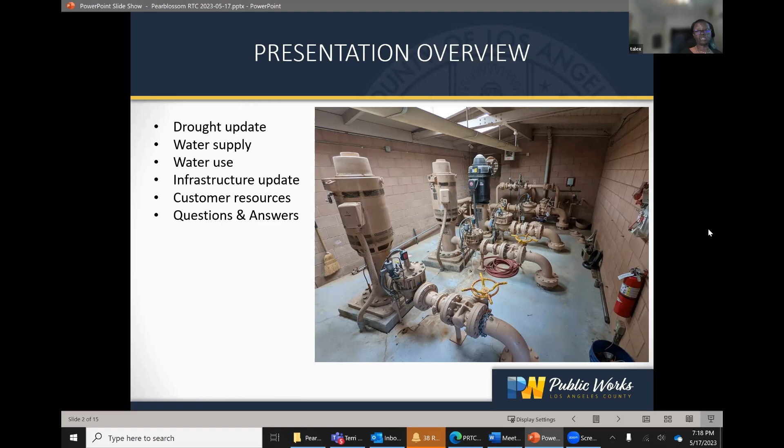Next. So first, let's start with some really good news: recent storms have helped California's reservoirs recover. But as you know, California had historic dry conditions from 2020 to 2022. Additionally, the Southwest US is still in a multi-decade drought, which means that Southern California's water challenges are far from over.

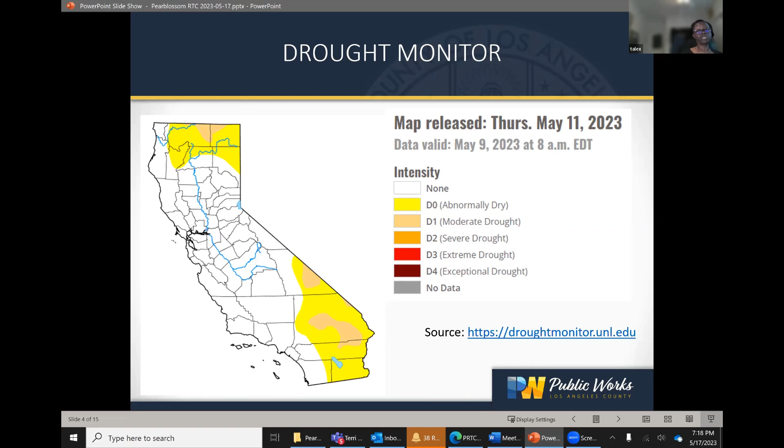Next. All right, so as a result of the winter storms, surface water supplies for the state are very healthy. However, one good season of rain does not undo the prolonged and extreme drought. So statewide, groundwater supplies are still low, and it'll take several years of rain to replenish. Just as quickly as the drought flipped this year, it can flip back just as quickly. So the region must work to ensure that we keep our water conservation efforts going.

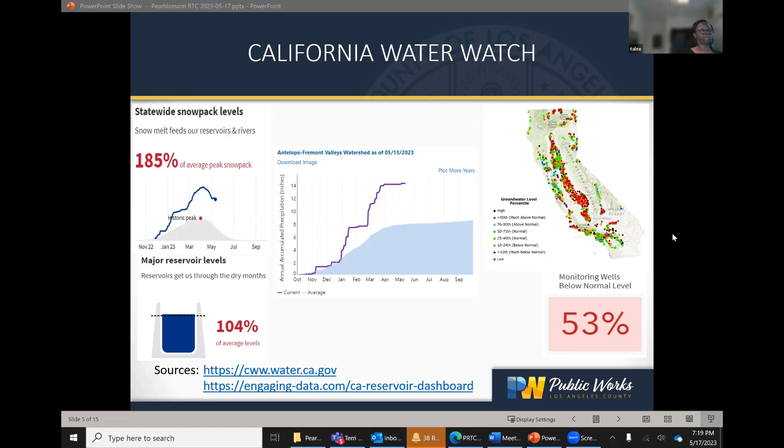Between 40 and 70% of water usage is for outdoor irrigation, as I'm sure you know. So we want to take this chance and thank you for your conservation efforts and to encourage you to keep up the good work.

Next. All right, so where does that leave us for this year? As you know, Governor Newsom rescinded the emergency executive order requiring water suppliers to activate the level 2 water shortage contingency plan. So this means that we have removed our two-day-per-week watering restrictions, and the updated outdoor water use restrictions will be included on our website soon - I'm thinking if not tomorrow, probably Friday or Monday, okay?

But even though the governor's order has been rescinded, we're still encouraging conservation as a way of life, which helps ensure our water supplies are safe, resilient, and sustainable. Because even though it's been a really wet year, our weather conditions can quickly turn from wet to dry, so we must be prepared for dry conditions if they return.

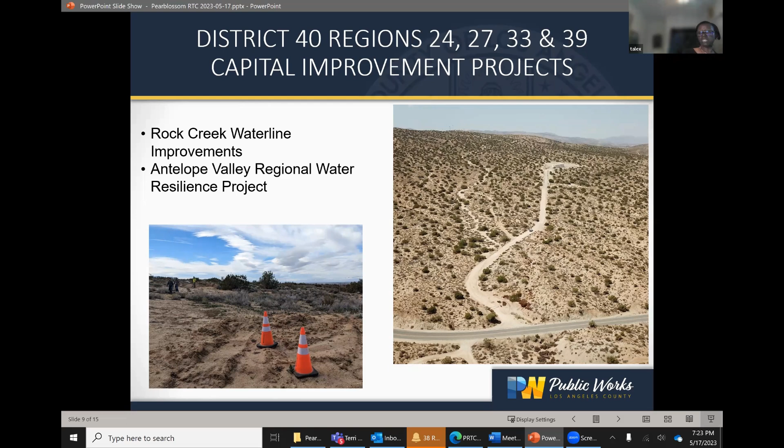We're always working to make our operation as efficient as possible. We're actively pursuing grant funding, loans, and other means to supplement the budget and support critical projects.

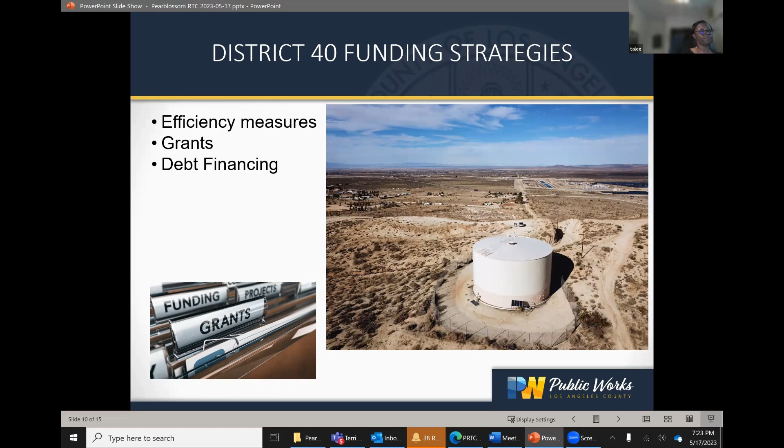Waterworks staff work 24/7 to ensure uninterrupted, safe, clean water. This includes routine maintenance, customer service, water quality, mechanical operations, inspections, and repairing leaks. We strive to maintain waterworks assets to industry standards to ensure they provide the expected cost-effective service life.

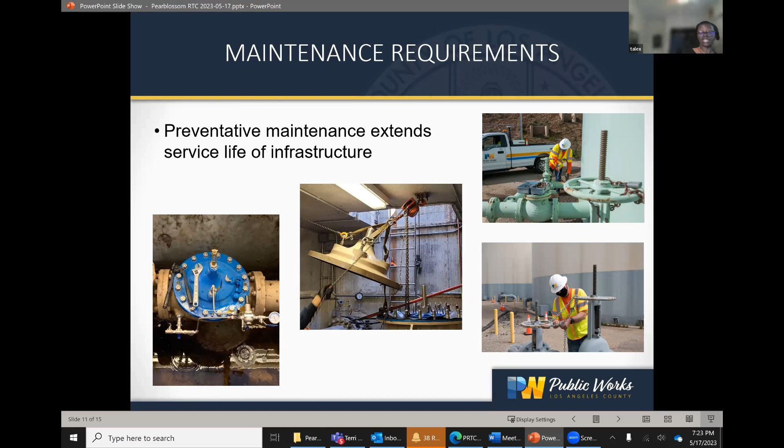We've made substantial investments in modernizing our system, resulting in more efficient operations and increased uptime. For example, we've improved resiliency by installing solar panels and battery backup, and monitoring and communication equipment to ensure uninterrupted operations during power failures. We've implemented a comprehensive asset management program to evaluate risks and prioritize investments, and we're reevaluating and optimizing maintenance procedures.

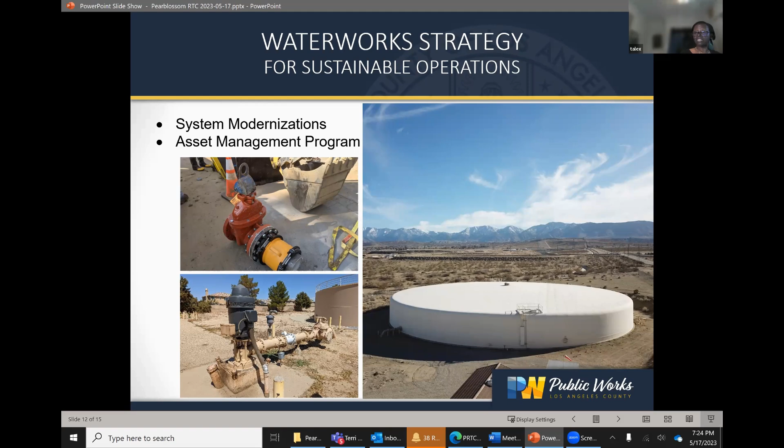Before I close, I'd like to remind you again to visit our website for information regarding the low-income household water assistance program, which will assist you with past due water bills, as well as to sign up for text alerts and to report water waste or obtain information about conservation and tips.

The drought is a quickly evolving topic. We'll keep you updated as changes occur. Waterworks is working to improve infrastructure resiliency. Thank you for your continued support and involvement. We are your water district and we exist to provide your community with safe, clean water, both today and for the long term. Thanks.

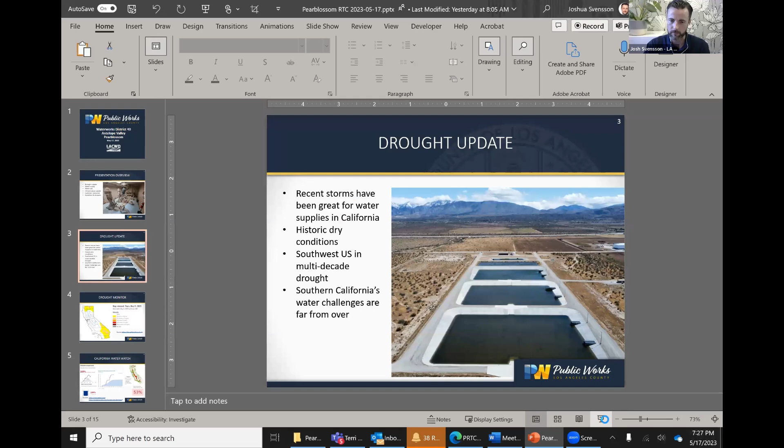That's a great question. I said I turned off the screen share, it's too late. I'm not able to play the new card much longer. I've been with the district 2 years now, and it's been about a year since I joined you guys for the first time, so I'm still learning all the ins and outs. But one of the things we do actively is recharge strategy, which is really important to us. That's why I wanted to include this picture—I think this is called the East Side Infiltration Project or East Side Recharge Project.

This is an AVEK project. This is one of three projects that AVEK has, and this one is much smaller than the two that are up in the north part of the county.

But generally speaking, we're very supportive of aquifer recharge. It's a great idea. Right now, the state has excess water. They're basically giving it to customers without taking away from their water allocation. It's called Article 21 water. It's not free, but we have to pay for it because of the delivery costs.

But we're getting as much of it as we can, and when I say we, it's being done by AVEK, our wholesale partner, and they're taking that water and using these facilities. There's even plans. This is a photo I took a week or so ago out on 106th, so this is in your neighborhood.

The Rock Creek one, I need to look into that. I have heard of that. I'm not as familiar whose project that is, and I don't believe we're involved, but we may be. I think it's a great idea, and I think it's absolutely the right strategy for the long-term, to help even out the climate whiplash.

Sweet. It took me a second to recognize that picture where it was, but I know exactly where that is.

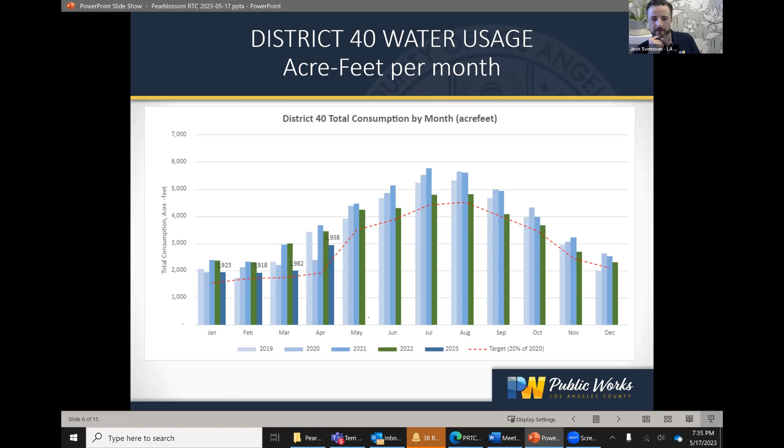It's really neat - let me find the slide. District 40 covers a lot of the Antelope Valley, but we call your area the cluster because it's these four different subregions. Your little subregion is kind of like its own very interesting microcosm of a water supply, because we're pulling water from the aqueduct and getting water from the aquifer, and there's recharge. Everything is kind of happening right there and you can see it all happening. So a tour of your region would be really interesting.

I think a couple of us here would enjoy a tour. I got a big Ford Excursion - I could put 8 of us in there on a cruise. We've done it before - we took the county out and some other community members and leadership. So looking forward to that.

Great, does anyone else here have any questions? One more - I think Robert has a question. So I've been in this town a long time.

When I was a kid growing up here, we drank water right out of the tap. It was delicious back then - not so much anymore. I can't speak for everybody here, but I drink bottled water now. It's not as good anymore. Are they treating it differently than they did 30 years ago? And where's the water coming from? Yeah, great question - let me just write this down so I can remember it.

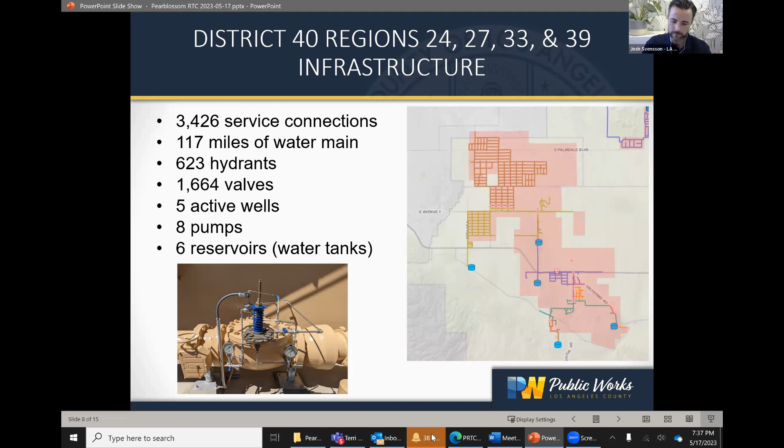I don't have the graphic open right now. If you guys are patient, let me pull it up. It's interesting.

Your water supply can vary quite a bit depending on the year, because we have the ability to pull water from the state aqueduct and we have the ability to get water from the local aquifer. And that's actually a huge asset, basically like having a massive reservoir under our feet.

Starting about 7 years ago, in 2016, the Antelope Valley aquifer was adjudicated, meaning the court said this is the sustainable amount of water we can pull out of this aquifer every year. Since then, all the major producers have had to adjust, and that's changed some of the quality of life for some of the farmers, because some were determined to be pulling too much water. It's complicated and very controversial.

People get very heated about it, so I don't want to push any buttons. But the point is, right now we have what's been deemed by the court to be a fair plan for sharing the water among all the major users. The main goal is that the aquifer will be protected. The way we manage it is, in dry years we use less, and in wet years we use a lot from the state water project.

Okay, this is going to take a moment to pull up, but I'll show you the graph that actually shows water use varying year by year.

Personally, I think the water from the aquifer tastes better, but that's the harder water. The water from the state water project is surface water, so it should be softer, but the treatment systems are basically the same.

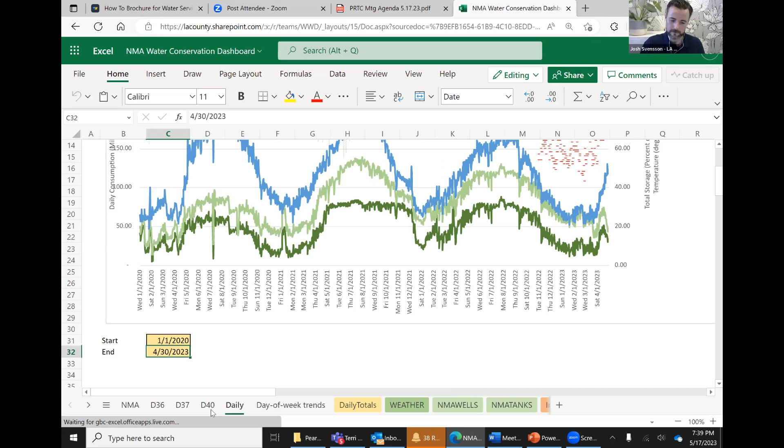Terry's giving me the look. Sorry, my bad, Terry. No, you're good.

Are there still wells in the area? Yes, I think we have 5 or 6, I forget the exact number.

So this is the really interesting graph that I like to show off. In a wet year, like 2019, this blue line is the amount of water we were getting from the state water project. These dark green lines are the amount of water we were pulling from our wells. This is for all of District 40, but I think it's similar to what happens in your region.

This green line here is the amount of water that AVEK is pulling from their banked water in the aquifer. In a dry year like last year, we only got a very small amount of the surface water, and we got a fair amount from the groundwater. So year to year, the water sources can change, and you can notice differences in taste depending on the source of the water.

Another thing I'd recommend, since I've got my web browser open, is to check our website, Waterworks, where we have a lot of good resources. One thing most people aren't aware of, we're actually planning our next meeting at some point in the future, I don't want to say exactly when, where we'd love to give you guys a presentation about your water supply and water quality. That's a question we get a lot.

I know, it's the water you're putting in your body. But the long story short is I drink this water from the aquifer in our office every day, and the water is safe and healthy. We do constant testing to make sure it stays that way. And the other half of that, I'm trying to find it.

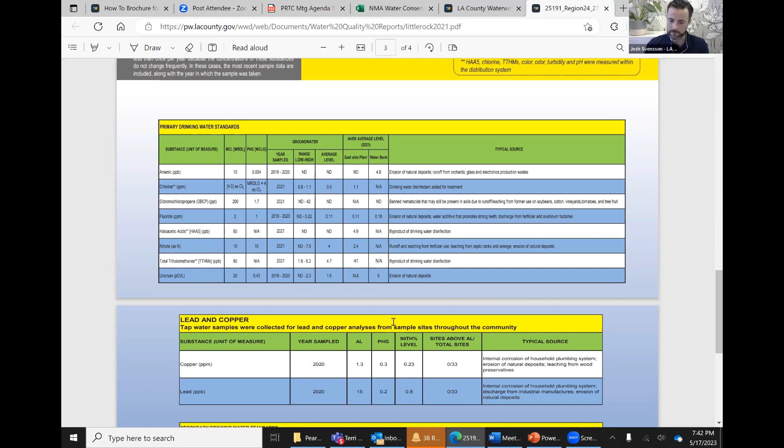Another issue, sometimes we have wells, and the wells put a little bit of air in the water so it can turn white, and we hear that every now and then. If you ever have concerns, you're always welcome to call our 800 number 24/7, and you can get through to a live representative, and we're happy to send somebody to your house. Usually if it's a water quality issue, we won't do that in the middle of the night, but if there's a water main break or anything like that, we have people on standby 24/7. But these reports have all the details, information, and lab results. You're welcome to check those out and ask questions about it.